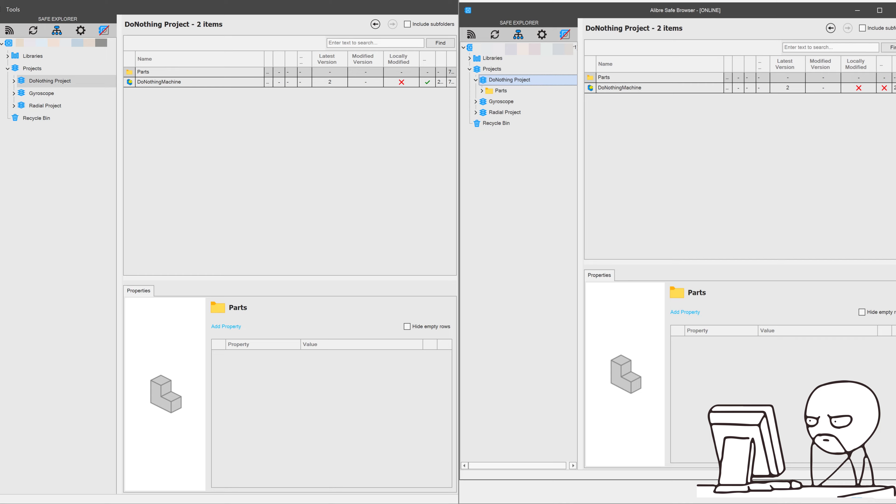To enhance my Do Nothing machine, I'll open up a display stand for it. There's my display stand. Let's do a save as. I won't check this into the safe for right now, but I will make sure that my Do Nothing project is selected.

I'll close my assembly and let's see what these things look like for me. First, you can see that we have all of our parts imported. Now, Bill can refresh all he wants, but nothing will show up because our parts are not checked in. So in order for parts to be visible to other users, we will need to make sure that these are checked in. I'll go to my display stand and check it in.

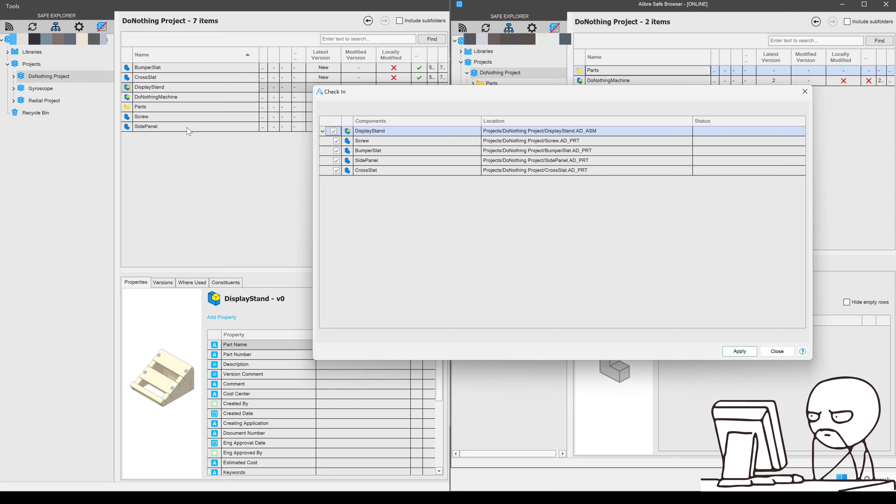Now, once it's checked in, Bill has a few options on how he wants to see the parts. You can always click this refresh button and things will show up, or you can simply navigate out of the view and back into it, and every time we click on a folder, things will update automatically. So through your natural navigations through the safe, you should be able to have things update as you need them. But if you want to make sure, there's always a refresh button up here.

Well, we'll say Bill sees these new files and would like to organize them a little bit. So perhaps Bill creates a new folder. We'll call it Subassemblies. And perhaps Bill will take this Do Nothing machine and move it into the Subassemblies folder.

Next, perhaps I'll want to take a look at that. And sure enough, my Subassemblies folder shows right up. Next, perhaps Bill wants to select the parts and move them into the Parts folder.

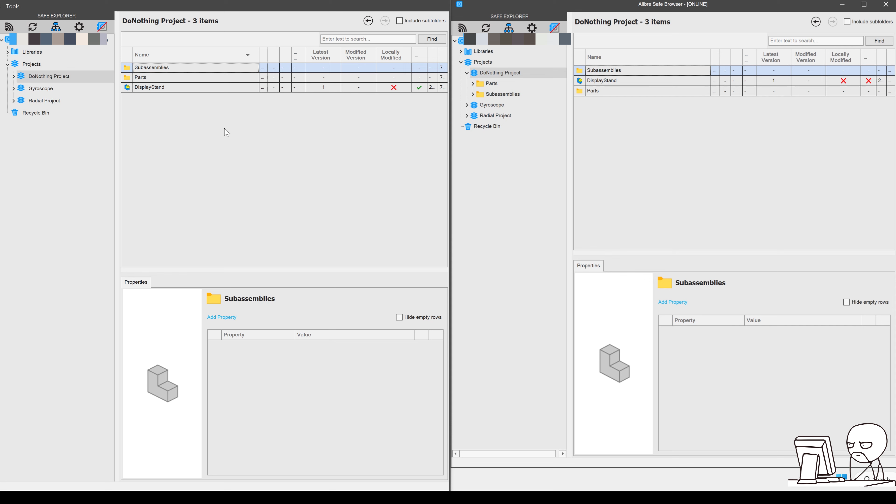Next, even just double-clicking in this gray space allows me to update and see the changes that Bill has made in real time. Well, now maybe I'll decide that I'd like to edit my display stand and include the Do Nothing machine on it. So I'll go ahead and open this file up.

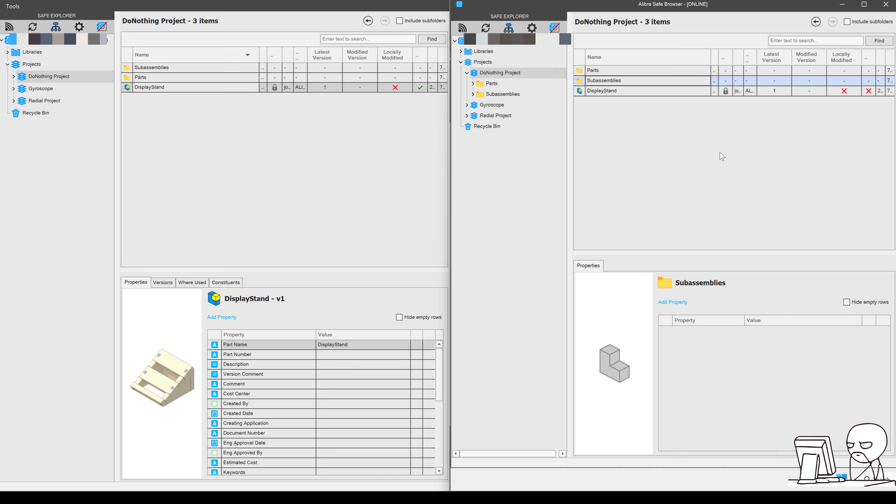As this file is open, I'll take a quick look over at Bill's PDM server. And as it refreshes, you can see that there is a lock on it. Bill can see that I am the one locking it. He also can see my machine that I am locking it from. So we'll go ahead and edit this, knowing that Bill can see my lock on there.

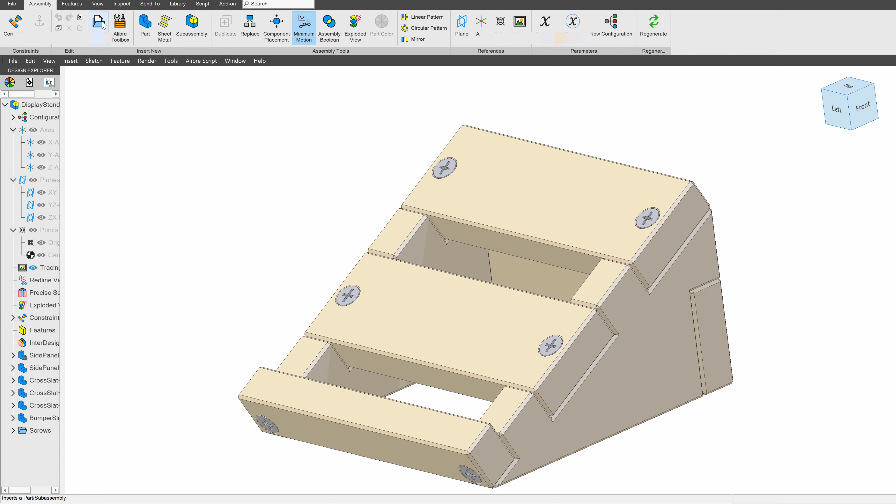And I'll insert my design as needed. There I've been able to place my Do Nothing machine on the display stand. So I'll go ahead and hit the Save button here. And as I save this, I'll check it into the safe and say OK.

You'll notice that my latest version is now on version 2. Bill's is on version 1, but as this updates, the PDM server will now say that it's on version 2.

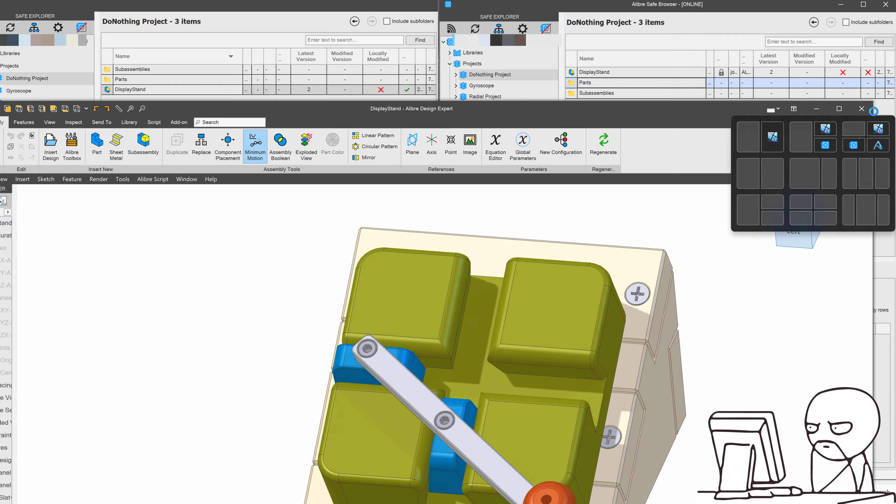There we go, and it is still locked by me. So I'll go ahead and close my window, and then the lock goes away with our Do Nothing project. So Bill can see that this is now unlocked.

Well, let's say I want to make one more change. I'll open my display stand. As you can tell, the lock shows up, and I'll begin editing first by, maybe I want to make this flexible. I'll go to my Do Nothing machine, make it flexible, and now I can move it around as a subassembly. So now I'll edit this part.

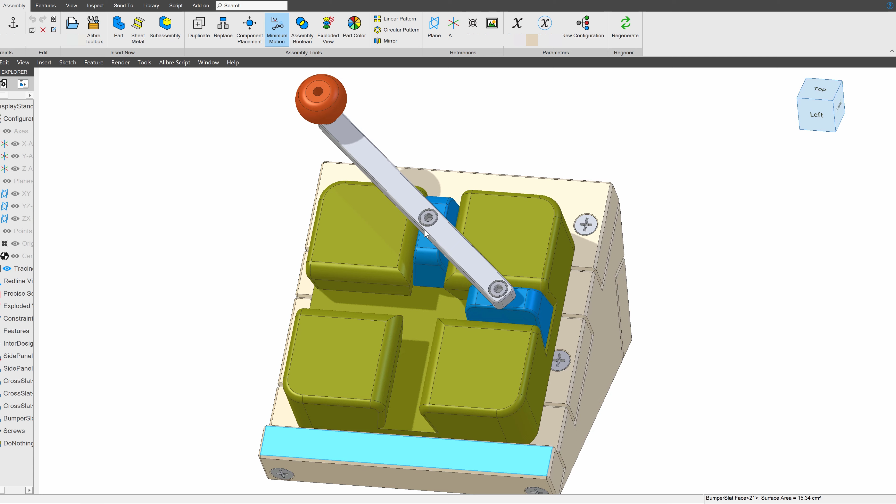By selecting Edit here, and I'll start a 2D sketch on this face. So here I've been able to edit my assembly in a way that I have my text engraved here.

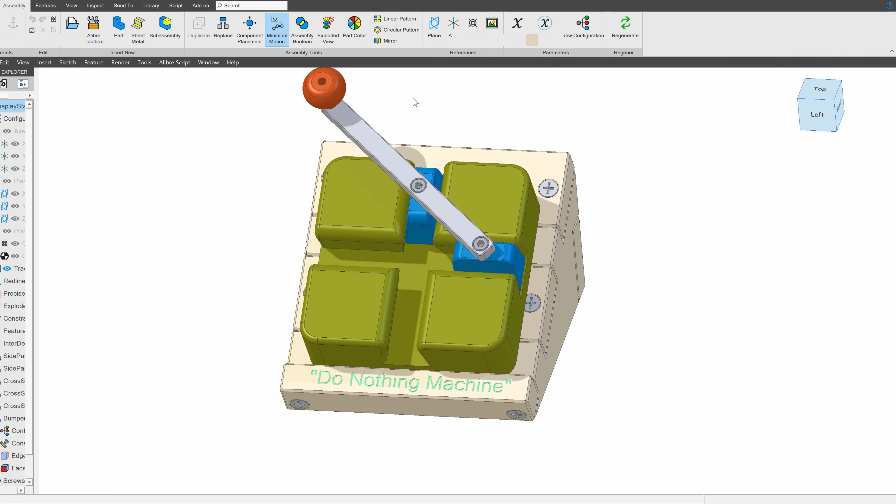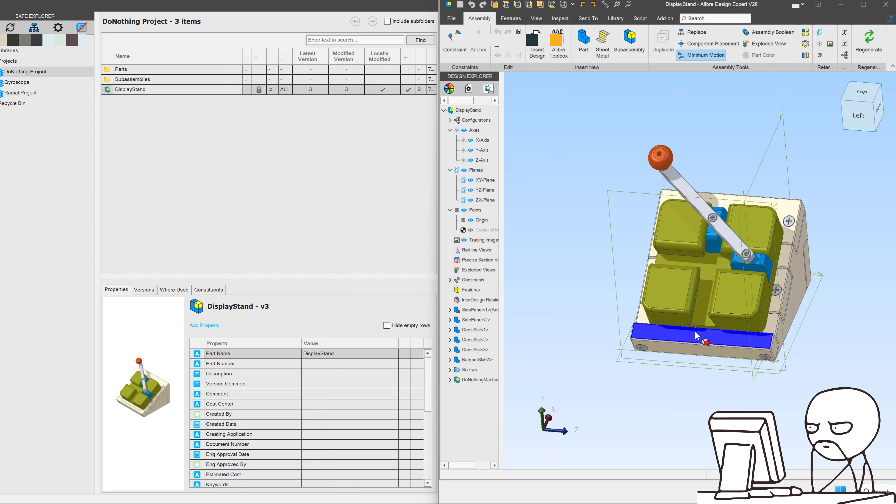I'm going to go ahead and save, but let's say that I don't check this in. Now let's say that Bill is very anxious to edit this Do Nothing machine as well, and he notices that it is locked, but he wants to edit it anyway. So Bill jumps on, and Bill also goes to edit this same part.

And we'll say that Bill came up with another modification. Perhaps it's a little bit narcissistic, but there we are. So Bill wants to save this as well. Let's have Bill hit the save button.

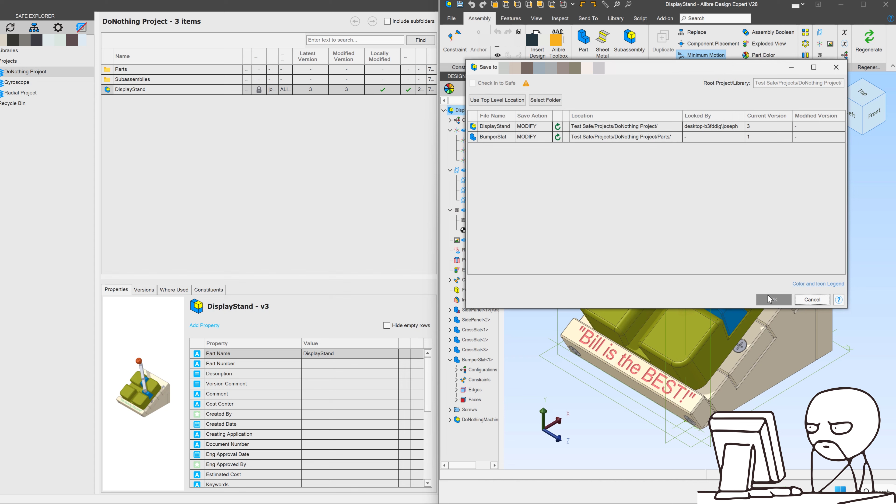And notice Bill's check-in to safe is grayed out, and he has this warning: this file is locked for editing by me. But he can proceed to save it locally. We'll have Bill close this.

And now I'll check this in. If I ever want to get rid of that lock icon manually, I can also right-click and unlock the part.

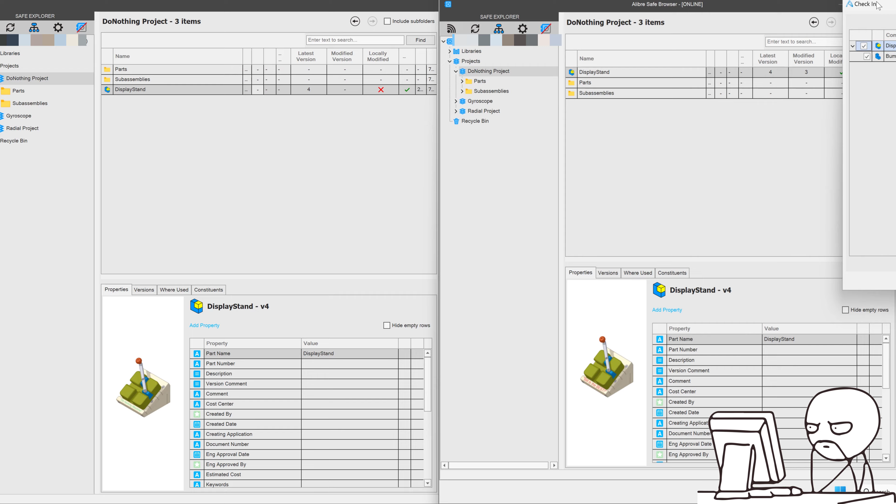And now, Bill wants to check in his changes. And Bill is told, you are trying to check in modifications based on an older version of this file. Are you sure you wish to continue?

So after this warning, we see another warning that says the parts folder is out of date. So let's make sure that we update the parts folder. And again, this updates just by clicking on it.

Now we'll go to the display stand, we'll check in. We see our warning, and we can apply our changes anyway.

And now we have different versions of our assembly, right? I can go to my versions here, and I can see my initial version. I can see where I made some changes, I think in version 4, there we go. And then Bill's changes are showing up in version 5.

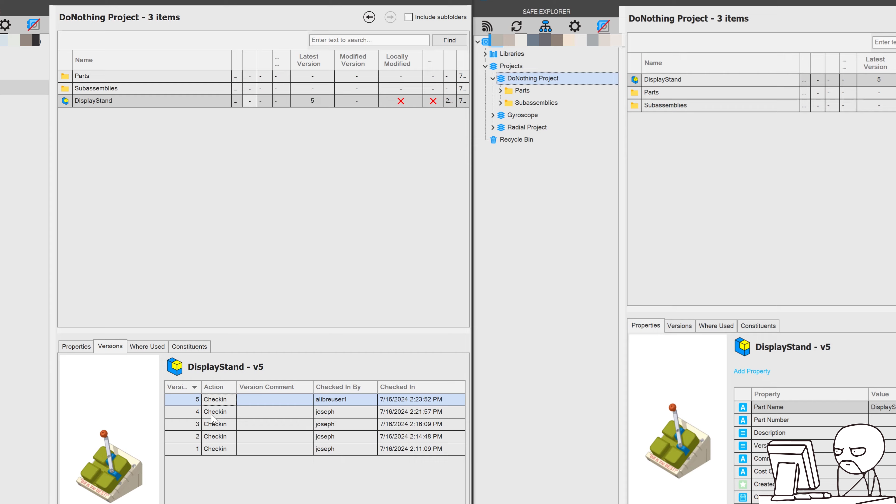So Bill and I need to meet and decide which one is best. And I think we'll have to go with the one that says Do Nothing Machine, so we'll restore that one, right? Now with these changes restored, we can see even on Bill's side there's now version 6 that's been restored from version 4, and the conflict is resolved.

We also can see where Bill checked this in, right? He checked it in as Alibre user 1.

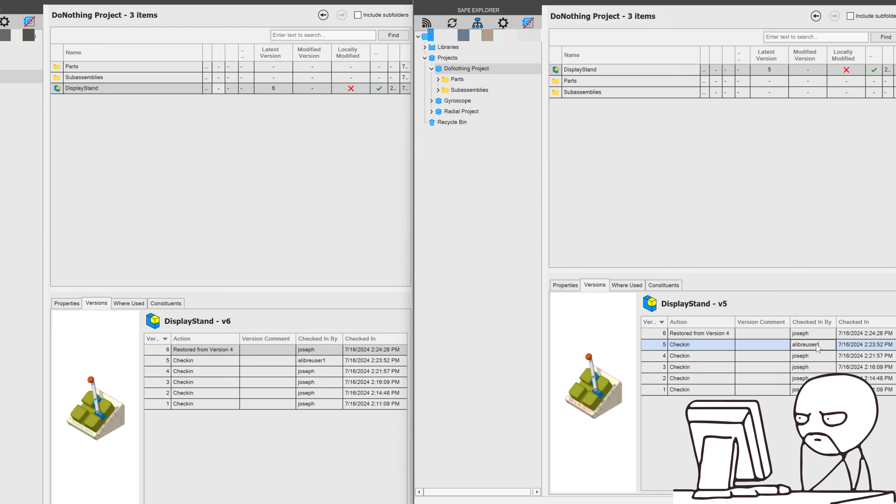So that's how we can deal with collaboration in the PDM server and SAFE. We're able to see, largely in real time, the updates that our users have been able to make. So that's how we're able to review in real time exactly what it looks like when people make changes in the folders that you are working on.

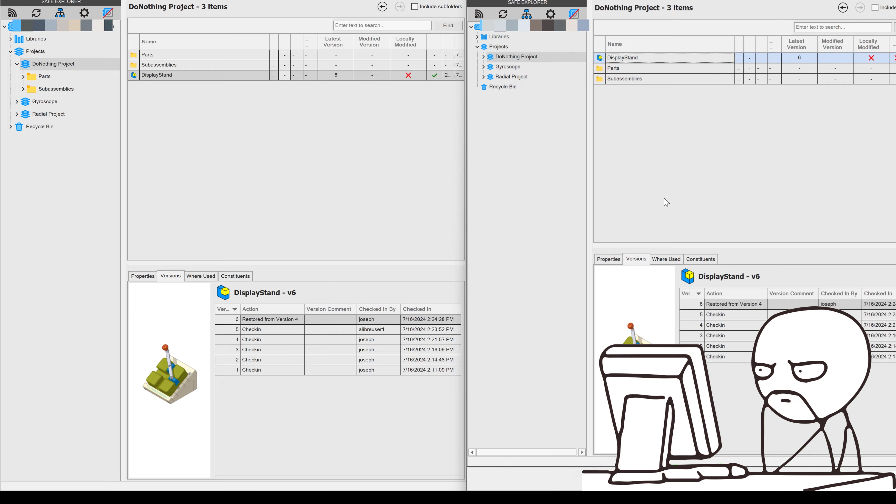And that is how we use collaboration in the PDM SAFE. Let's also cover in the next video some interesting parts of metadata and how to really make the most of it in your parts.